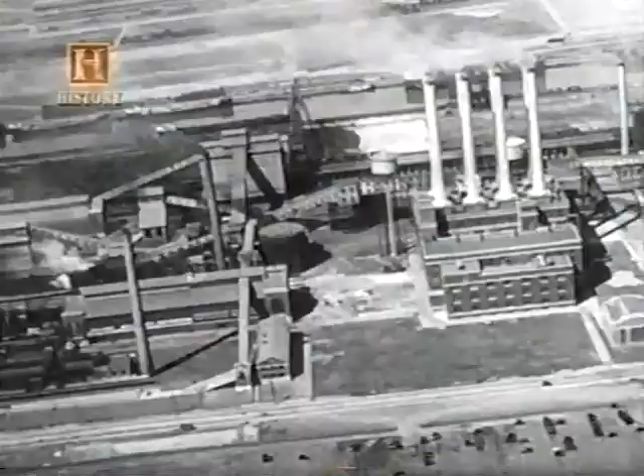Before steam, mostly we used animals as our mode of transportation. When steam came along, of course, we could move more material faster and more reliably than we could with animals. And so that was a big transformation. People became less tied to being in small cities. They could live out in the farm and still be connected, if you will, to the cities.

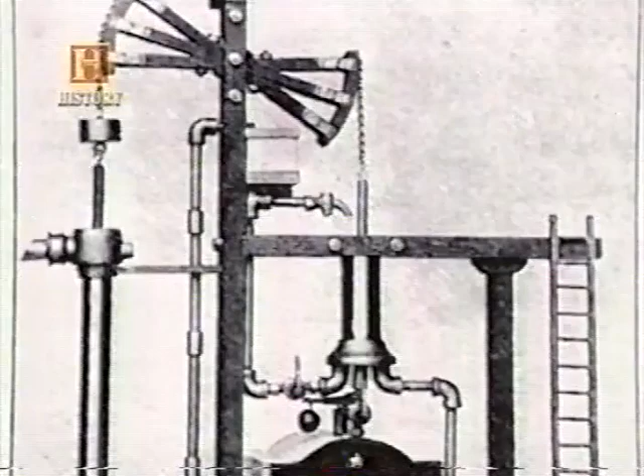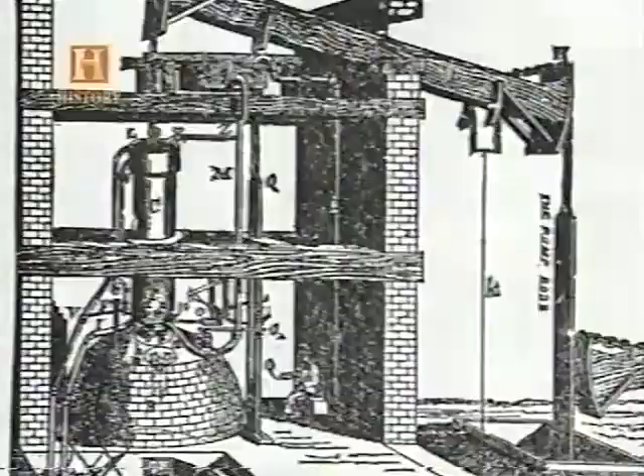These early engines didn't have the gearing that could convert reciprocating motion into circular machine driving motion. That didn't happen until the 1770s when James Watt developed what is probably the most famous steam engine of the 18th century.

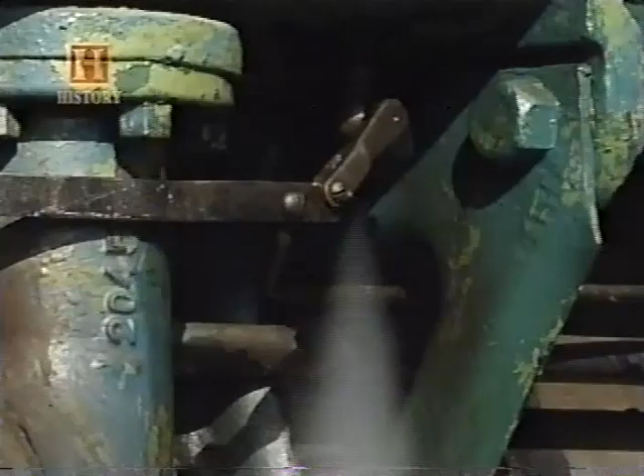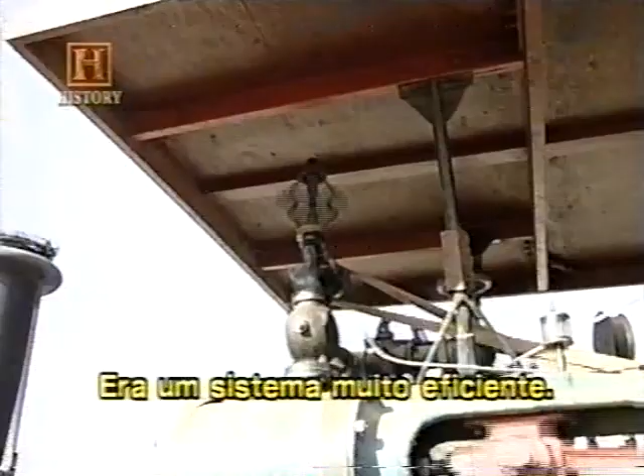And as it spread out, it would control the movement of steam into the cylinder. And that was a very efficient device to keep it from revving out of control, but more importantly, to keep it in a steady, regular, uniform motion.

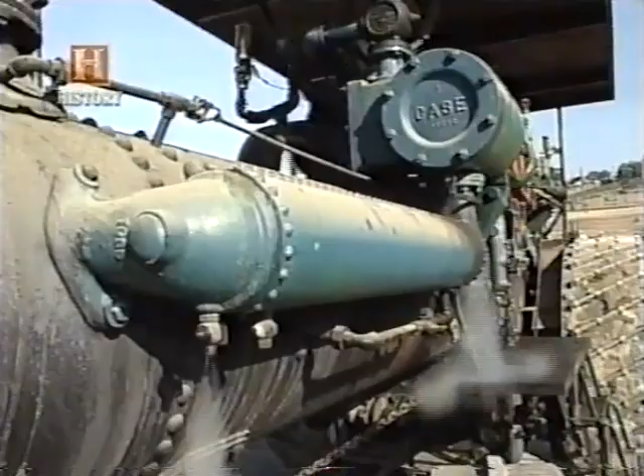Britain was the first nation in the West, and in the world really, to become industrialized, and so much of what was going on there was built around the advent of steam power.

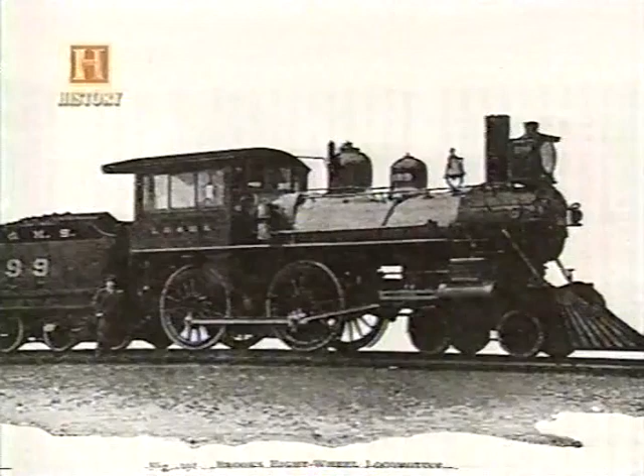Whether you're burning straw in the field with an agricultural engine, whether you're burning wood, whether you're back east and you're burning coal, you know, the steam engine was very adaptable and hungry for any fuel you could feed it.

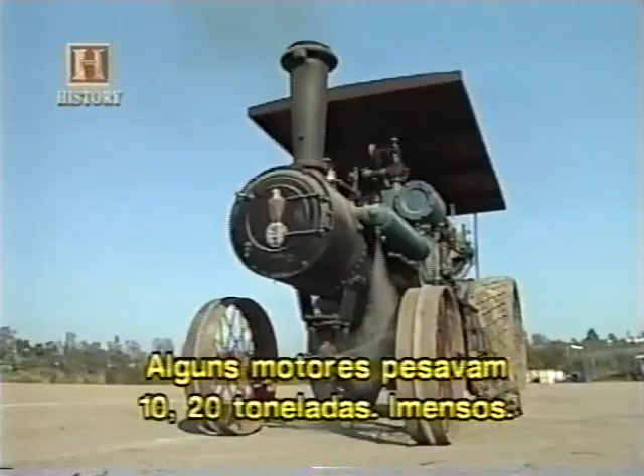That was an era when terms like behemoth, leviathan, some of those terms were very commonly used. Some of these engines weighed up to 10, 20 tons. Huge.

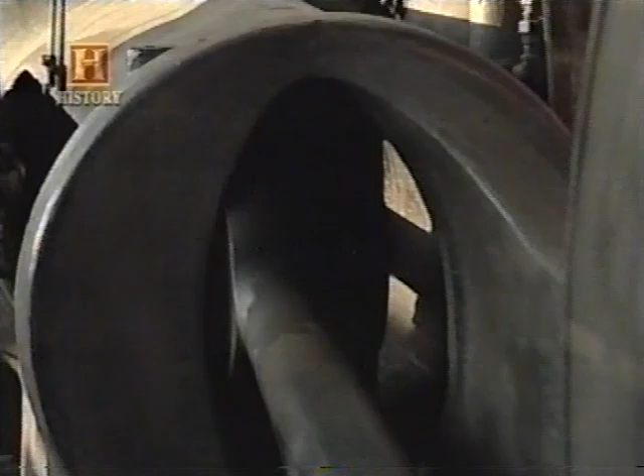They had steam readily available to cook and clean the beets, power all the machinery. It powered a generator in that factory, so they had the lights and the power for everything else, and the motive power to run the centrifuge to run the sugar out of the beet pulp. So, very efficient system. The steam engine just did it all.

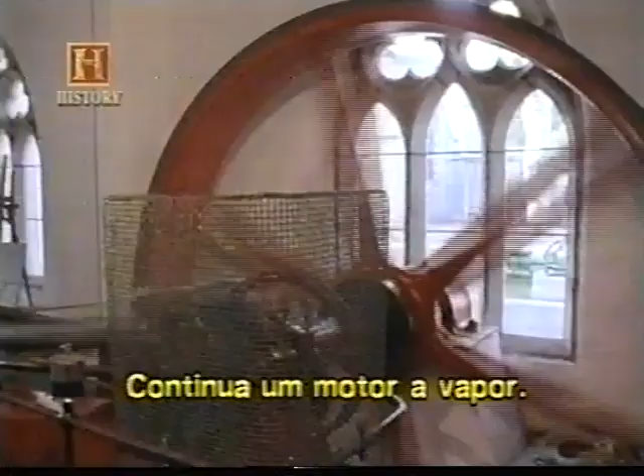The power plant engine is indeed a steam engine, whether, again, the heat source is a nuclear source or coal or natural gas. It is a steam engine. It's somewhat ironic that we still use a technology that was invented almost 200 years ago.

The water circulates through the core, picks up the heat from the fission event, takes it to the steam generator where it flashes to steam, goes out of the steam generator into the main steam pipes, into the main turbine where it turns the turbine to make electricity.

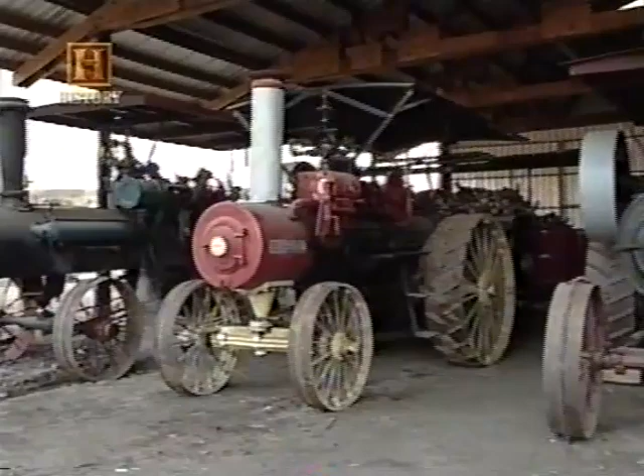Heat transfer is a slow process, and in the steam engine, one needs to transfer heat from a hot fluid, namely the combustion gases, to the working fluid that actually produces the power, namely steam. And people found that by using an internal combustion engine, where the thing that does the expansion and the thing that generates the heat is one and the same material, namely the fuel-air mixture, one could get much more power out of a given size engine.

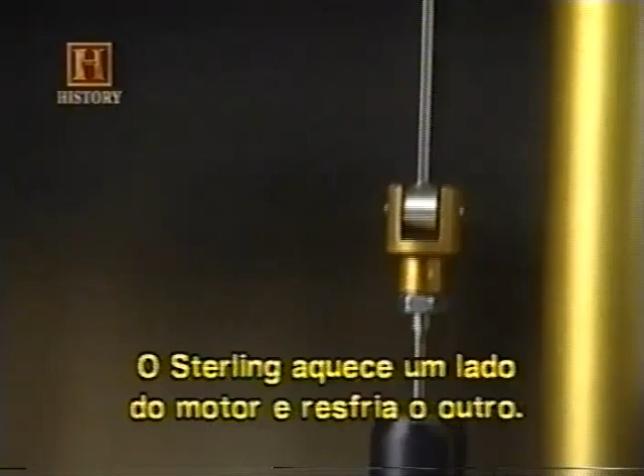The Stirling engines that he developed were low-pressure engines, and so there was nothing really in there that was a high pressure that could explode even if the machine failed. Stirling engines are engines that heat one side of the engine and cool the other side of the engine. And then there's a mechanism inside the engine that moves the air back and forth between the hot side and the cold side. When the air is on the hot side, it expands and pushes up on a piston. When the air is on a cold side, it contracts and pulls down on a piston.

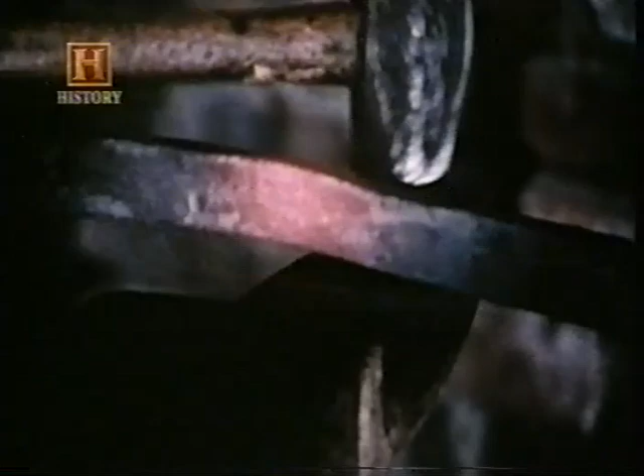The metals didn't stand up to the high temperature, continuous flame. The boiler is the part of the steam engine that is exposed to continuous flame. In a Stirling engine, it's the hot cylinder of the engine, so it's a different part of the engine.

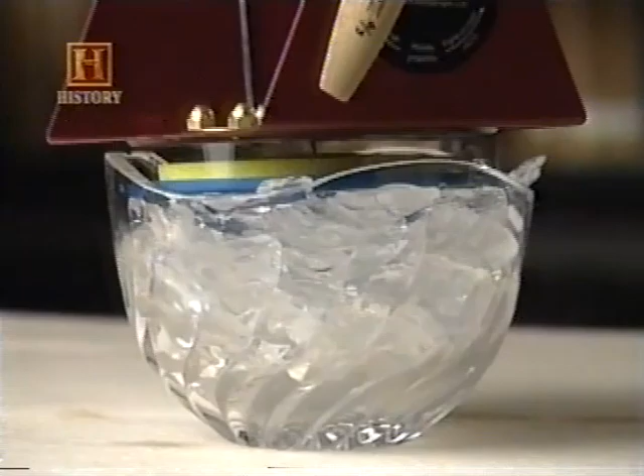All you've got to do is keep one side hot and the other side cold. You can do that any place that you can keep the temperature difference. These things will run.

Now, over the decades, people have tried to put Stirling engines in vehicles, and the conclusion right now is no. It's an expensive engine, much more expensive than the sort of alternatives like gasoline, diesel engines. And it's very hard to make it efficient on a vehicle because the way the engine is running changes all the time. As you and I drive, we speed up, we slow down, we accelerate. That makes it hard for the engine to stay efficient all the time, especially hard for the Stirling engine.

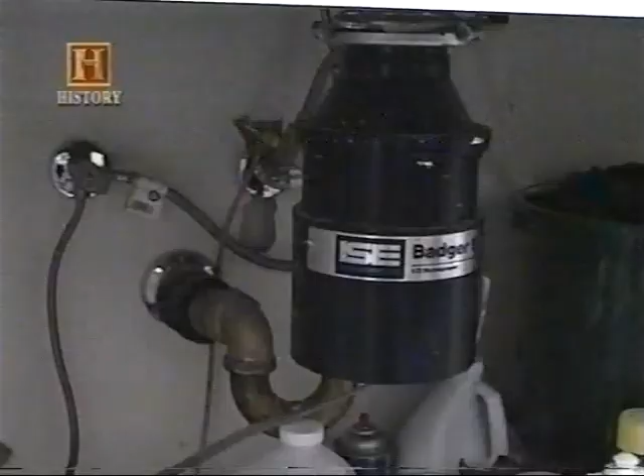Without it, we wouldn't even be able to sit here and make this interview. It wouldn't be worth getting out of bed unless you wanted to be back in the horse and buggy days.

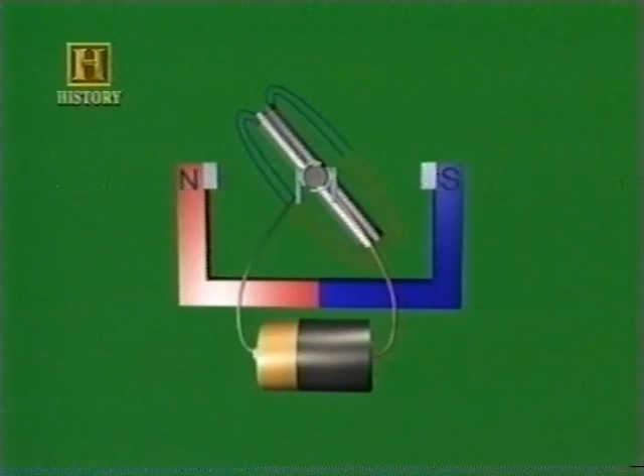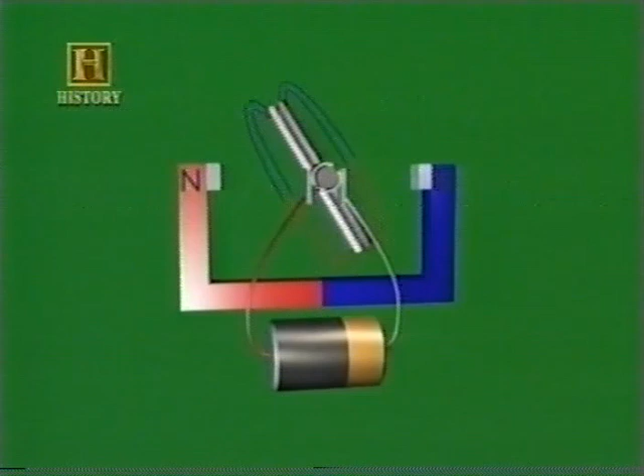What it does is it creates a magnetic field. And it actually drives it, just like Doug and I are doing. As the power is going through this field, this is a magnetic field and it's revolving around here. And it's sucking this around.

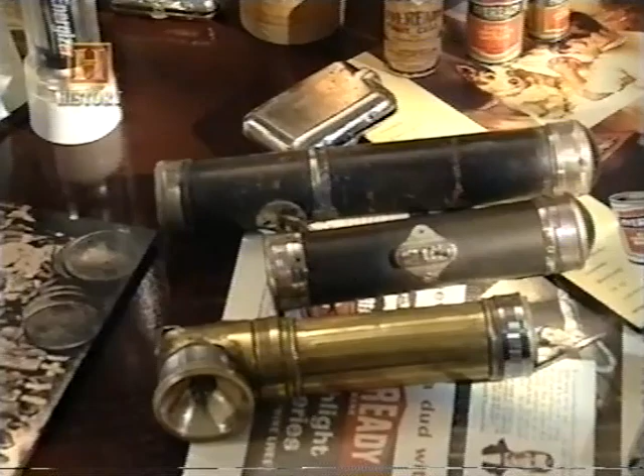Tesla was the first one who introduced the concept of alternating current, where you would change the polarity back and forth at 60 times or 50 times a second. And Edison didn't believe in that, and Edison actually fired Tesla, and he went to work for George Westinghouse. Tesla was right. Alternating current could be transmitted over miles and miles, and there were significant limitations for direct current transmission distribution systems.

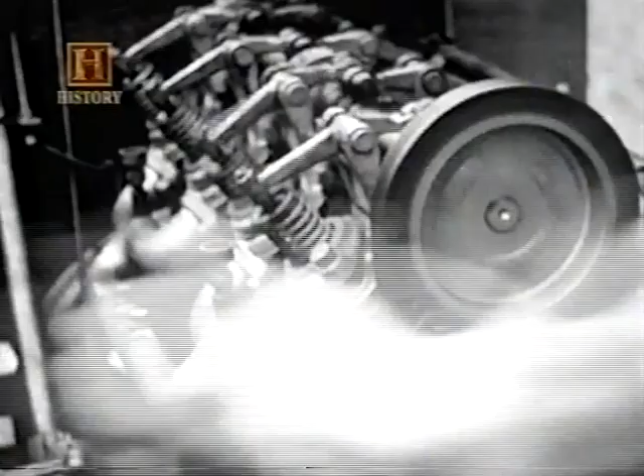Up until that time, you had to crank an engine to get it started, and it was not only difficult, but was dangerous. It could really break bones in your arm. If one of those things jerked back on you, you could really hurt yourself. But with the electric starter, that changed the whole ball game and immediately signaled the demise of both the electric automobile and the steam-powered automobile.

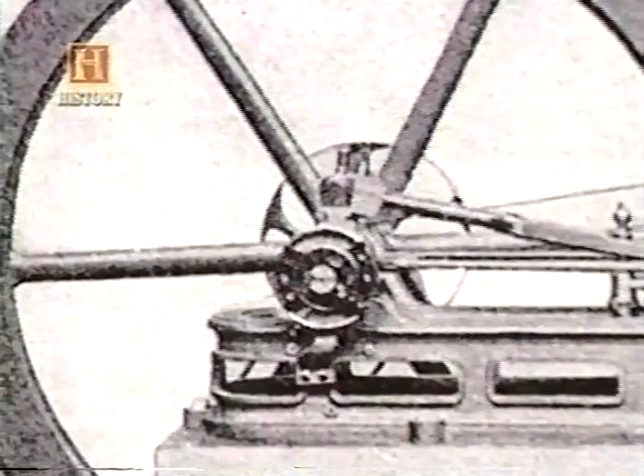Ele desenvolveu o primeiro motor de combustão interna em 1860. Como os primeiros motores a vapor, ele foi criado para drenar a água de minas de carvão. Foi um grande sucesso e cerca de 5.000 unidades foram vendidas.

16 anos depois, Nikolaus Otto patenteou o primeiro motor de 4 tempos de combustão interna. Este sistema é usado em quase todos os carros modernos. Portanto, o nome automóvel é bastante adequado.

We're still using that same 4-stroke cycle, and roughly our arrangement, we've got a piston in a cylinder, we've got a connecting rod, and we've got a crank as our simple mechanism for converting the up and down piston motion to rotation of a drive shaft. That's what he came up with, and we're still using that today, 150 years later.

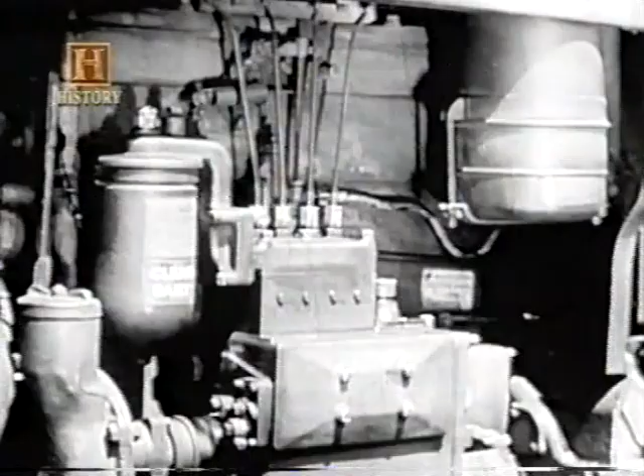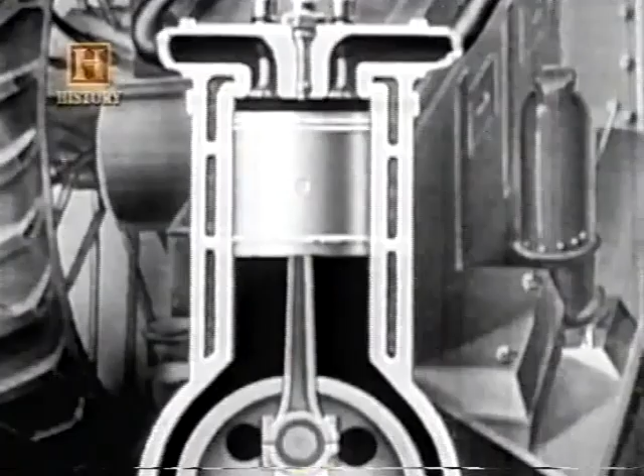Em 1892, Rudolf Diesel patenteou o motor a diesel. Note the absence of a spark plug. Ele é similar ao motor comum, mas não possui velas de ignição. O ar é sugado quando o cilindro desce. Depois, é comprimido quando ele sobe, ficando extremamente quente. Tão quente que quando o óleo é injetado, a mistura de ar e combustível explode.

A Mercedes-Benz construiu os primeiros automóveis a diesel nos anos 30. Por causa de sua força bruta e resistência, os motores a diesel são usados em caminhões e equipamentos pesados.

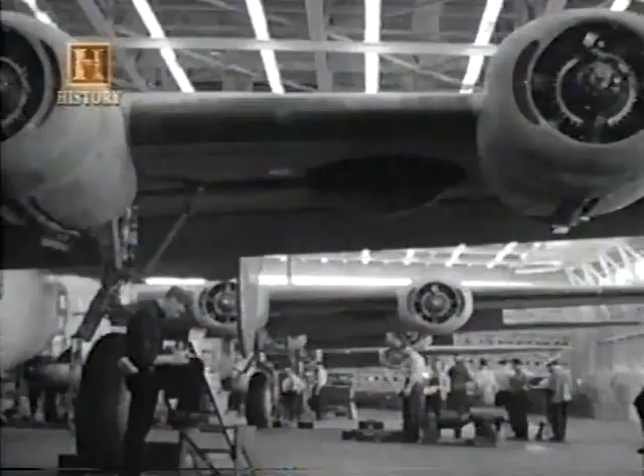A evolução dos motores a gasolina e a diesel mudou as cidades e também mudou as guerras. Na Segunda Guerra Mundial, a produção de motores americanos atingiu um recorde histórico. Os motores feitos em Detroit alimentavam a guerra. Os fabricantes americanos usaram suas máquinas para construir 4 milhões de motores para caminhões, carros e aviões.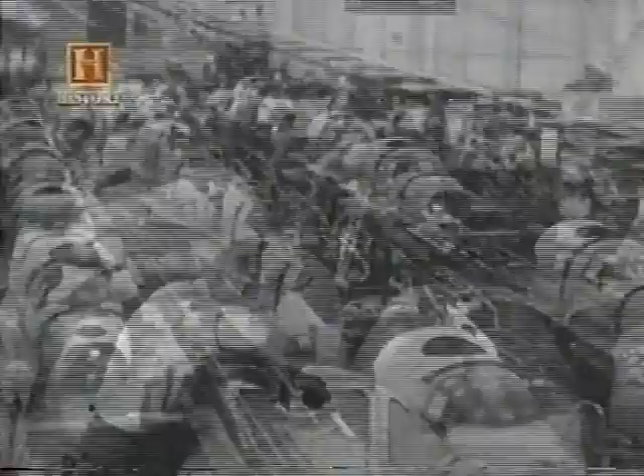Esta fábrica no Michigan custou ao governo 65 milhões de dólares. Sob a gerência de Henry Ford, ela entregou 57 mil motores de avião e 9 mil bombardeiros. Ford também fabricou 250 mil tanques e jipes.

Since we were relying on piston engine aircraft for our fighters and bombers, the automobile industry converted its engine production facilities to producing engines for these applications, and the new car production went down to very low numbers.

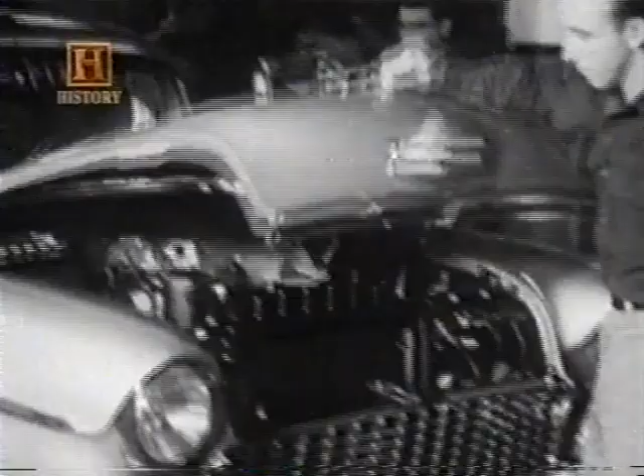Até os anos 50, o objetivo da indústria era fazer motores mais potentes e baratos. Então, algo surgiu no horizonte: a poluição. E graças a ela, a tecnologia de motores precisou avançar em outra direção.

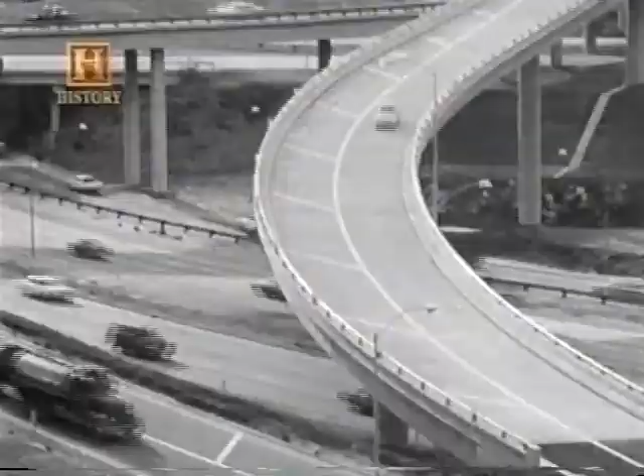Sistemas de controle de poluentes criados nos anos 60 e 70 reduziram as emissões, mas também diminuíram a potência, pois limitavam a entrada de ar. Um motor que não pode respirar livremente produz menos potência.

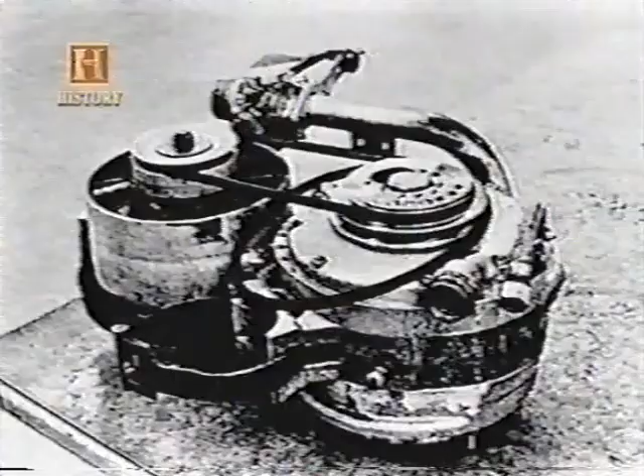Na vida do motor de combustão interna, a maioria dos avanços foi evolucionária, mas um deles foi revolucionário. O inventor alemão Felix Wankel projetou um motor de combustão interna radicalmente novo em 1924. Mas somente em 57 conseguiu construir o primeiro motor Wankel rotativo.

Ele era completamente diferente do motor a pistão e, como girava, ao invés de subir e descer, reduzia sensivelmente a vibração.

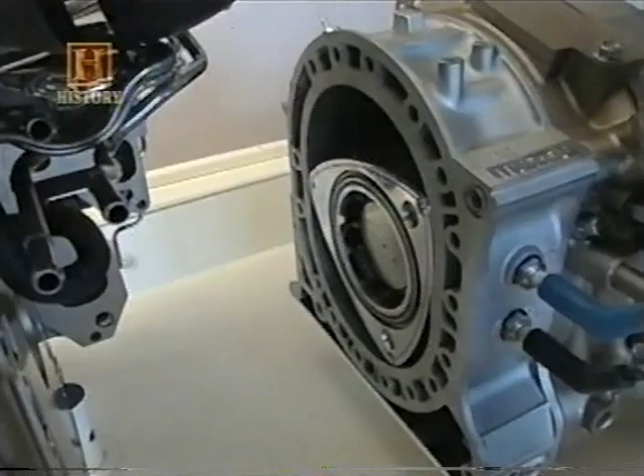Many people over time have tried to think of a better geometry. There are some negatives to this simple piston connecting rod cylinder arrangement. Masses move up and down, and that's hard to prevent that causing vibration. But so far, with the one exception of the Wankel, nobody's invented a geometry that's got into real-world production.

This roughly triangular-shaped rotor sort of moves around inside a container, but not quite symmetrically. It's off-center, and so as it rotates this triangular rotor, it creates sort of smaller volumes and larger volumes, in a similar way to the piston moving up and down in a standard engine cylinder.

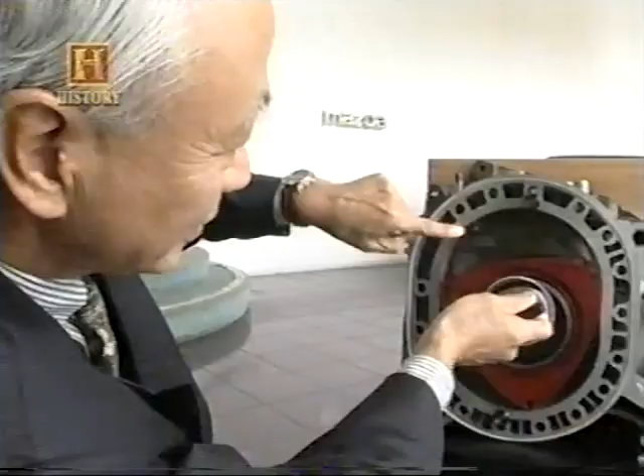I have a very strong attachment to the rotary engine, without any question. Kobe Kobayakawa, recentemente aposentado, dirigiu o projeto do carro de motor rotativo RX-7 da Mazda.

This is the only moving part of the rotary engine, and we don't have any intake or exhaust valve or camshaft. Basically, we have only two moving parts, two rotors. In the case of a V6 engine, the moving parts, like pistons and connecting rod and valves and camshaft, maybe 50 moving parts.

Em 2001, a Mazda concluiu o desenvolvimento de um novo carro com motor rotativo chamado de RX-8.

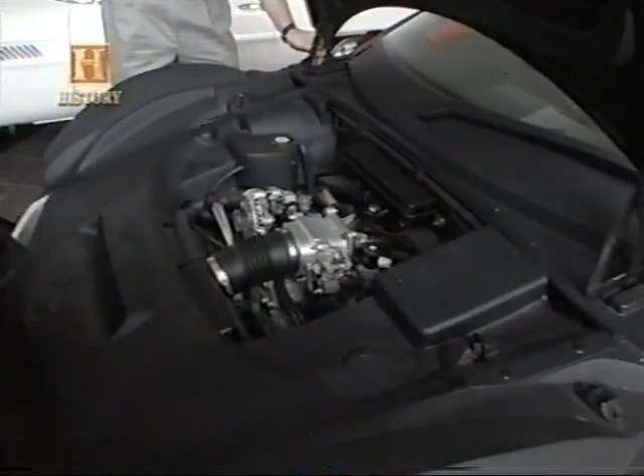Ele pode parecer pequeno, mas seu motor de 255 cavalos pode competir com motores a pistão muito maiores. Atualmente é o único motor produzido em massa que não possui pistões.

Kobe conversou com Felix Wankel pouco antes da morte do inventor em 88.

I have been admiring him so many years. His eye to look into Mazda rotary engine is always more like a father's eye looking at the children. He's so nice, and he was very pleased with the Mazda's effort and the result about the rotary engine.

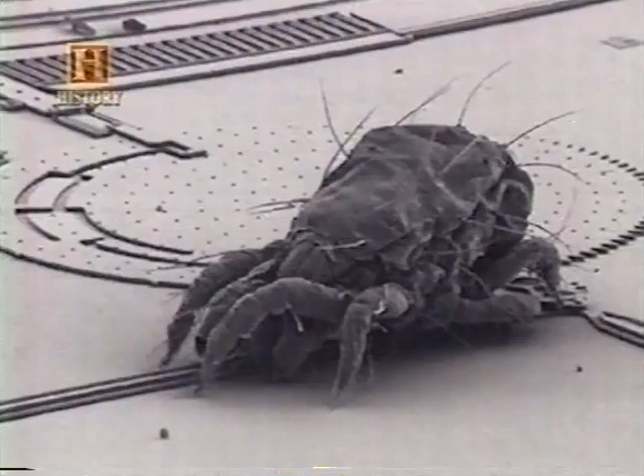Felix Wankel ficaria orgulhoso em saber que sua ideia radical, concebida em 1924, continua girando. A seguir, pequenos motores que fazem um ácaro parecer um monstro. É a microtecnologia, o próximo passo da evolução dos motores.

Esta semana na história, os segredos de um dos berços do pecado, Pompeia. O projeto Viking consegue pela primeira vez aterrissar uma nave na...

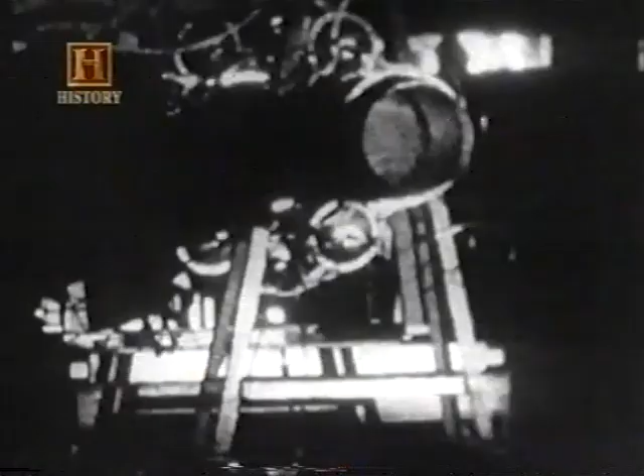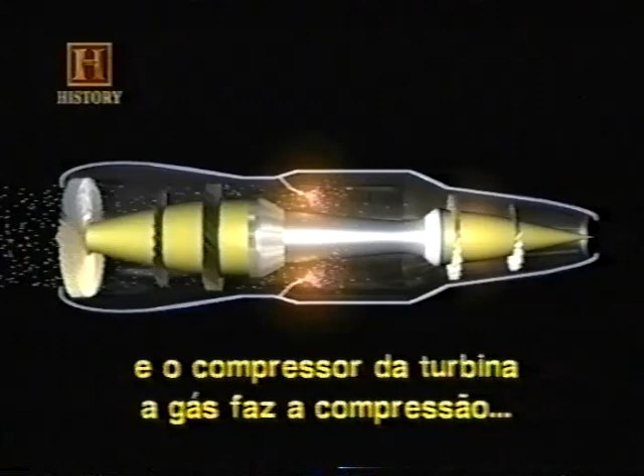Jet engine is a gas turbine where you throw the exhaust gases fast out the back end to provide thrust, and the compressor and turbine of the gas turbine do the compressing to give you the high flow you need to throw out, and the turbine provides the work to drive the compressor, and what's left is what you use for thrust.

Imagine if you're baking cookies, one at a time. You put some dough on a tray, shove it into the oven, wait for it to bake, and then pull it out. That's what we do in the internal combustion engine with the reciprocating piston. We put the fuel air mixture in, stop. We compress it, stop. Burn it, expand it, stop. Push it out, stop. It's constantly stop, start, stop, start.

Whereas with the jet engine, it's basically a continuous process. Imagine putting all your cookie dough on a conveyor belt and running it through an oven.

Tudo começou há 60 anos, quando a Inglaterra e a Alemanha competiam para desenvolver o primeiro avião a jato. Em 1941, a Alemanha saiu na frente com um protótipo de caça, o HE-280. Um ano depois, os alemães tinham um caça a jato ainda melhor, o ME-262, o primeiro avião a jato a ser produzido em massa. O primeiro jato britânico, o Gloster Meteor, de 2 motores, foi testado pela primeira vez em março de 43.

Desde então, evoluímos muito. A indústria Airbus está desenvolvendo o Super Jumbo, um avião de 2 andares, 50% maior do que um Boeing 747 e capaz de transportar até 700 passageiros.

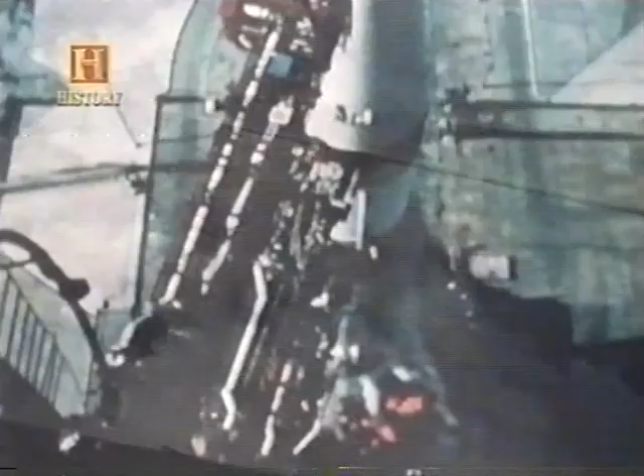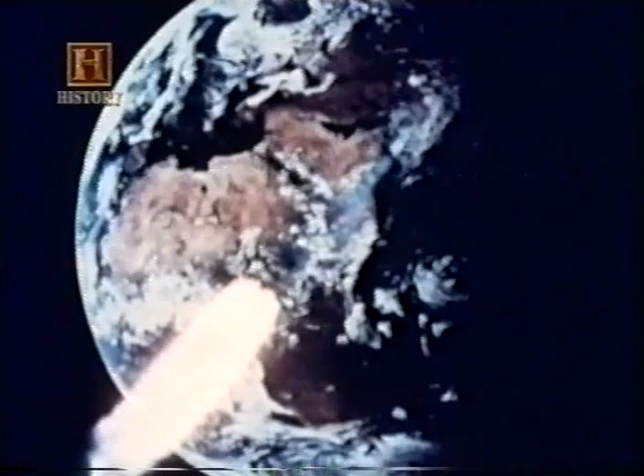No início, os motores a foguete e a jato eram muito próximos e quase não havia distinção entre eles. Um foguete é parecido com um jato, mas carrega seu próprio suprimento de oxigênio para gerar combustão. Os jatos sugam o oxigênio do ar, os foguetes dos tanques de oxigênio anexados. Isso quer dizer que um foguete pode viajar pelo espaço onde não há oxigênio.

As experiências do americano Robert Goddard com foguetes dos anos 30 foram seguidas pelos testes de Wernher von Braun, na Alemanha nazista, que levaram à criação dos foguetes V2. We knew that we had created a new means of warfare.

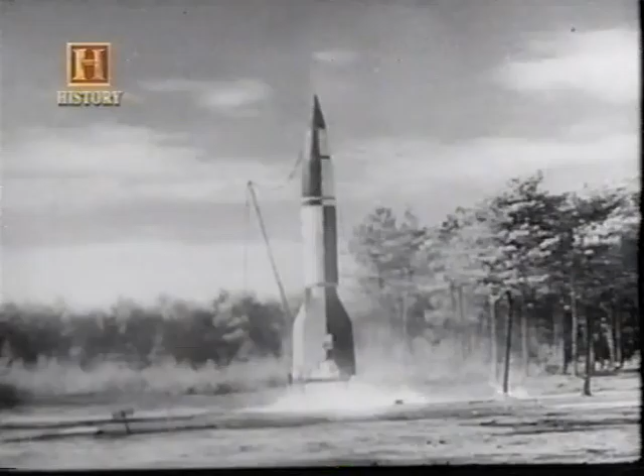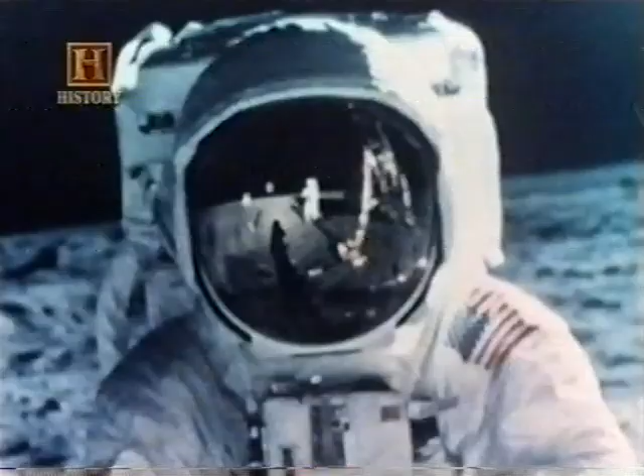A tecnologia criada por Goddard e von Braun permitiu façanhas como o rompimento da barreira do som por Chuck Yeager em 47, o lançamento do Sputnik em 57 e a viagem da Apollo 11 à Lua em 69.

Hoje, os 3 foguetes que movimentam o ônibus espacial produzem um impulso de 37 milhões de cavalos, o equivalente a 23 represas Hoover. Juntos, eles consomem 240 mil litros de hidrogênio líquido por minuto.

Os motores são móveis e usados para manobrar a nave durante o voo. Eles também fornecem um impulso adicional para a decolagem, somando-se a 2 enormes foguetes que são descartados durante o voo.

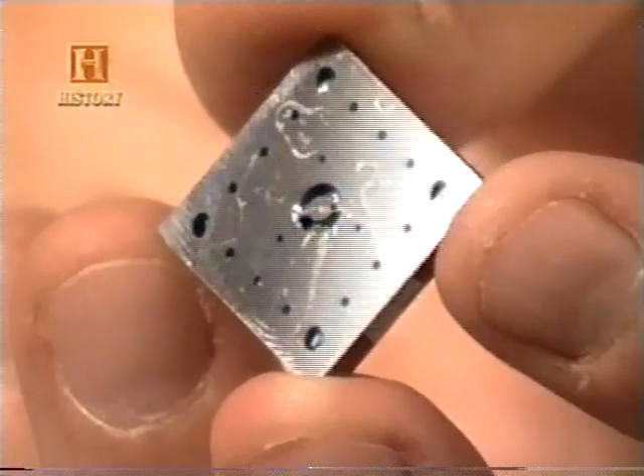Há décadas, os avanços tecnológicos vêm trazendo motores maiores. Mas uma das áreas mais promissoras envolve a criação de motores pequenos, que cabem na ponta de um dedo. A microtecnologia é uma área crescente. Ela surgiu com a miniaturização de componentes eletrônicos. Algumas das mesmas técnicas estão sendo usadas na construção de micromotores.

There are actually advantages to making things small. As you miniaturize something, the weight goes down as the third power of the dimension, but the propulsive force goes down as the second power of the dimension. So as it gets smaller, the actual propulsion to weight goes up.

O professor Martin Schmidt, do MIT, desenvolveu uma turbina a jato do tamanho de um selo. Mas por quê? Well, first, it's awful fun. Second, there's propulsion applications, miniature aircraft, miniature satellites.

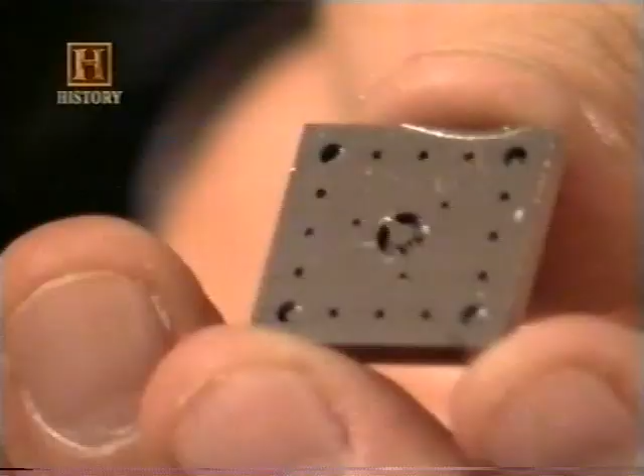A turbina a jato do professor Schmidt funciona exatamente como as de um 747. This would be a turbine engine where air would come in through the center hole, and then fuel would be injected through a variety of these ports located here.

The air and fuel would mix after going across a compressor, enter a combustion volume in a circular region that surrounds this, and then go across a set of turbine blades and be exhausted out through this port. Inside of that lamination is a little disc that'll spin at 1.5 million RPM.

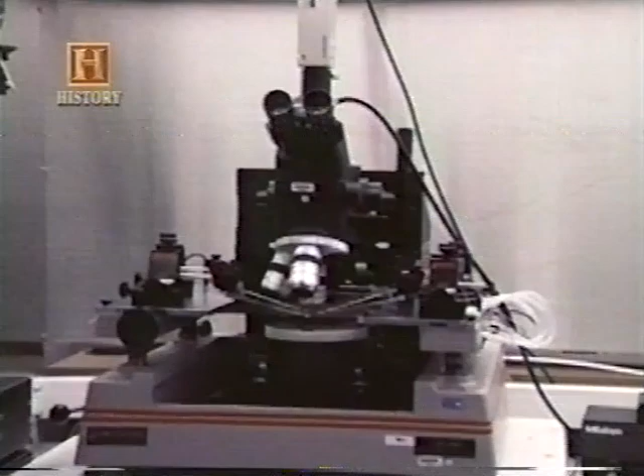Nano means a billionth. So things that are a billionth of a meter would be a nanometer, which is what is often discussed. A row of 10 atoms is 1 nanometer long.

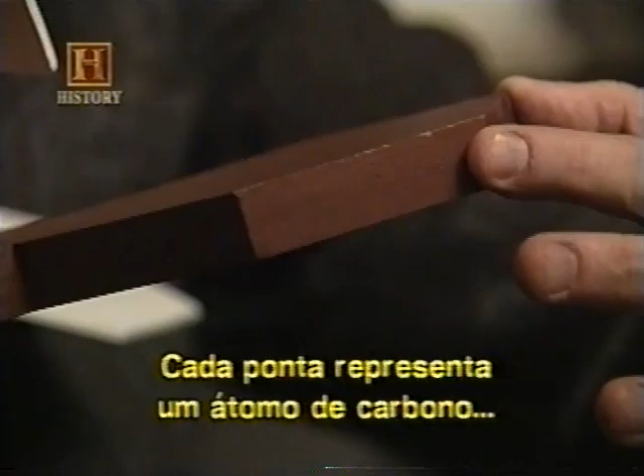Each corner represents a carbon atom with a hydrogen atom on it. It's connected to the next corner by a bond between 2 carbon atoms, and the next corner by another bond between 2 carbon atoms. Because of the laws of chemistry, one can predict how long the distances are going to be and what the geometries are going to be.